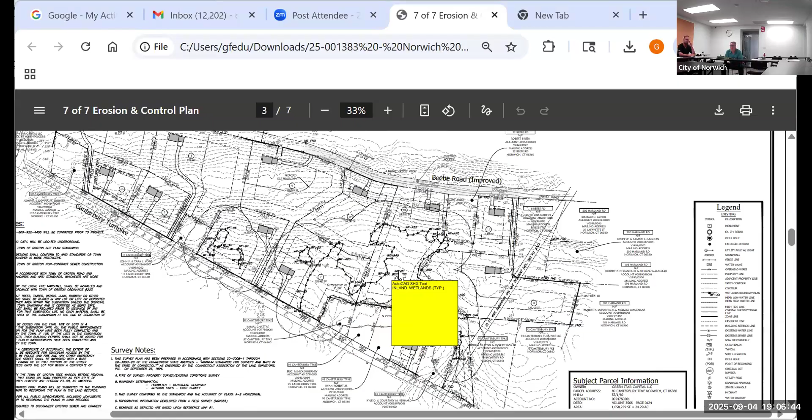Okay, so I don't know if we need to go through all the plans. I figured this is the most applicable to the wetlands activity within the regulated review area, starting on the north side of the property. You can see where the property starts, and starts with lot one. As I stated, lots 1, 2, 3, and 4 do not have any wetlands on them. Canterbury Turnpike is to the west, and Beebe Road portion, most of it's unimproved.

There's only a portion we have access to, so you'll see lots 1 and 4 have access actually off of Canterbury Turnpike with driveways. So they're kind of flag lots, even though they appear to have frontage on Beebe Road. Our access doesn't start till about the middle of lot 6. So lots 6, 8, 9, which is located down off of Canterbury Turnpike, and 11 and 12, the homes and the driveways are located outside of the regulated review area.

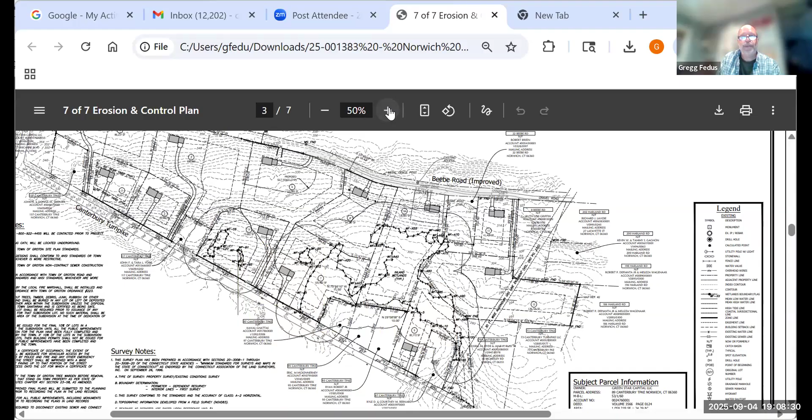So starting with lot 5, I'm gonna blow this up a little bit so we can take a look at it. That access has a driveway off of Canterbury Turnpike. The house is situated in the upper right corner of the lot, I guess the southeast corner of the lot. You can see the wetlands located on the northwest side and central portion of the lot. Little islands of wetlands there. Regulated review areas around those. So the driveway again is pushed to approximately 75 feet from the wetlands, and then the house is located outside.

Just to broad stroke a couple of items on the review memos from the planner as well as the engineer. We do owe some more detail to the plans with utilities and septic designs, preliminary septic designs. So we will show those. But basically the houses are all located on the higher portions of the lot, and the septic systems will be located just down gradient from those. Again, they're not shown here.

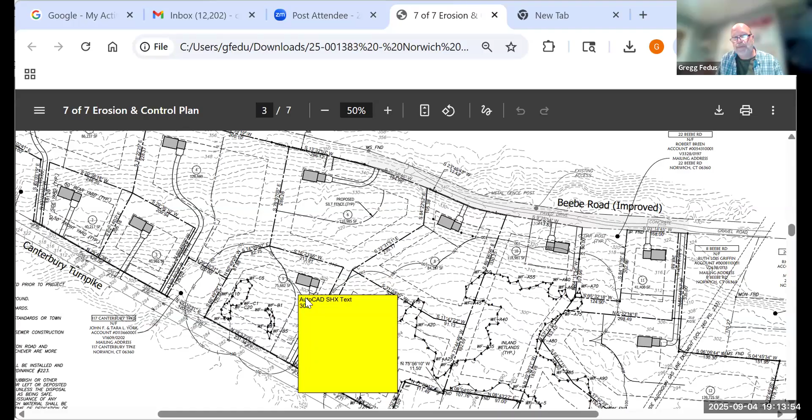Going back to lot number 5, you said the only thing that's in the regulated area is the driveway? That's correct. The driveway is located in the regulated area. Looking at it now, it looks like a portion of the septic system, which is going to be just down gradient of the house, will be on the outskirts of that, probably crossing over the 100-foot regulated review a little bit.

The drainage from the driveway, from the impervious surfaces, that's going where? We made mention in our notes of doing a rain garden for each of the houses that would capture the impervious from the roof structures. The driveways, for example the driveway in 5, would be graded with a slight super elevation away from the wetlands. But we're planning on just dealing with the impervious from the house structures. If it's important, we can take a look at certain driveways and capturing the impervious there also and putting it into a rain garden down gradient.

Lot 6. Can you go into a little more detail? Lot 6 is this one up here. That's pretty far away. Yeah, 7. So 7 is kind of tucked down below this little wetland here, and again within the 100-foot regulated review. The driveway starts just outside of it, but works its way in. It's possible we can flip that house. How much of the house is in the regulated area? Looks like 100% of the house is in the regulated review area, so it's probably about 50 feet to the wetlands.

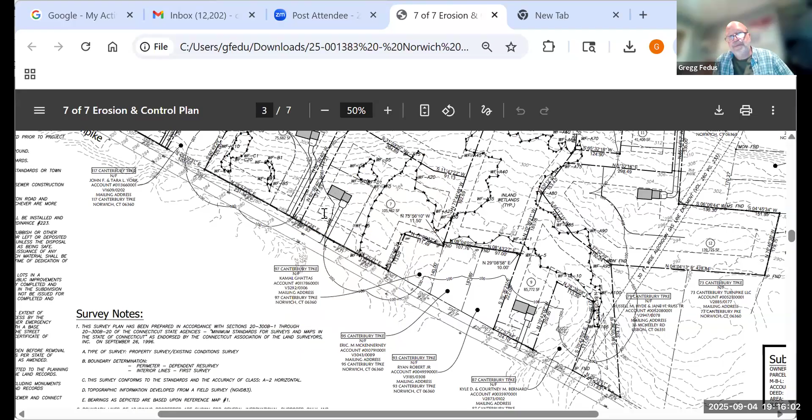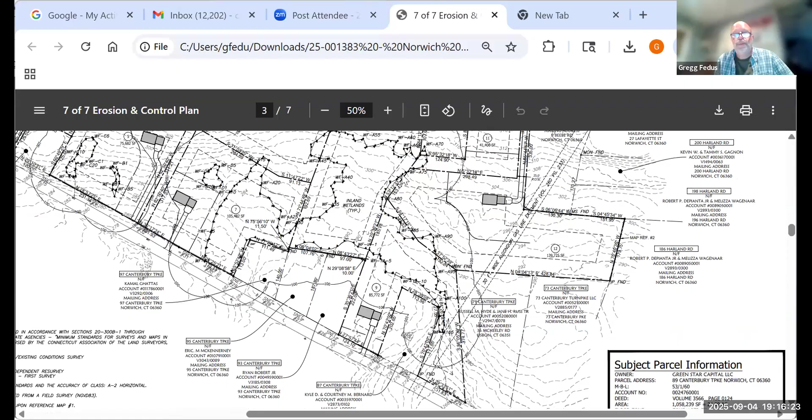Okay, and on lot 10, can you bring that up? Let me get it over and see if I can blow that up a little. So the rear of the house is in the regulated area? Yeah, and that's driven by the front yard setback along Beebe Road. Looks like we could maybe shift it to the middle of the lot and almost get the whole house out of the 100-foot regulated review area.

Having the house on the other side of the driveway, in other words? Yes, and maybe pull the garage forward a little bit. And again, these are just templates for houses. I think one of the comments was you'd be coming back to us for each individual approval. Yes, sir.

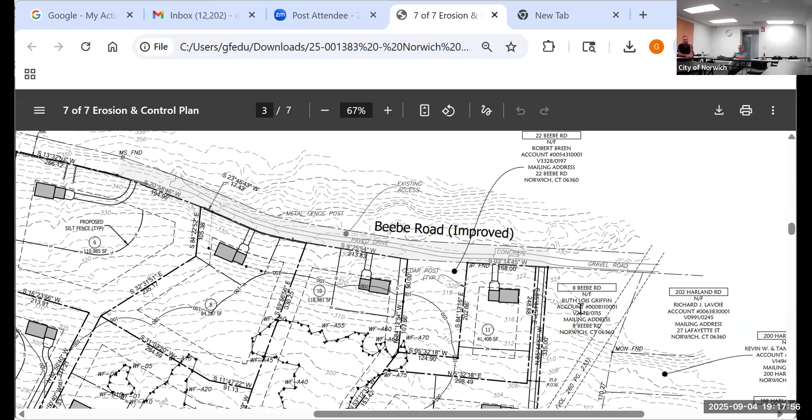Brandon, you have any question? Yeah, I'm just trying to remember how many times we've approved a subdivision with lots where the houses appeared to be either wholly or a good part in the upland review area. Seems to be quite maximized. I guess I have concern. Can you zoom in, please, to the left of 11, at 10? This one? Yes, please.

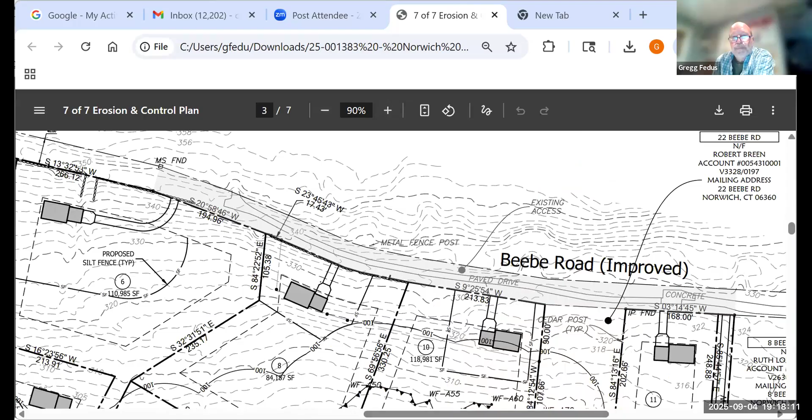Okay, and then move your... trying to get an idea of the topography. That right there is good. Thank you.

So everything sheds, that entire lot sheds into the wetlands. Is that correct? From Beebe Road straight into the wetlands. Beebe Road is up higher than Canterbury Turnpike, so their entire property gradient slopes down all the way towards the wetlands.

So what is your plan to intercept water coming off the rear of lot 10 to slow it down before it gets into the wetland? Did you plan on a rain garden there?

Well, we'd have a rain garden for the impervious of the house and the garage. The driveway, I would like to get it to grade towards Beebe Road. It'll grade away from the garage towards Beebe Road, but I'm not sure we're going to get enough slope or enough height on the garage to get it all the way to the driveway or to Beebe Road. So if your requirements, we'll be back before you with lot 10 with detailed grading.

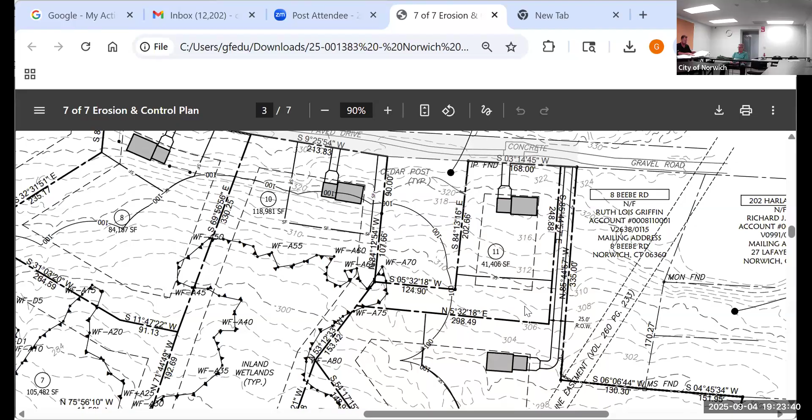We lost you guys. Can you hear everybody now? Yeah, I can hear you. I can hear. Okay.

Dean, did you have any questions? I don't have any questions. There seems to be a lot of details that are not incorporated here - details that aren't included that may be addressed in revisions, such as driveways, wells, septic, and defined grading that town officials may want to see.

What's your feeling, Dan? Would you like to see more detail? I'd suggest that maybe you guys could table this till next month. We have a number of questions we'd like to see answered between myself and the engineer, I think we could make a better decision with more detail. So I can go through my memo, but I think I'd prefer to come back to you next month saying most of it's been addressed.

But they are aware of your concerns or needs right now, right? Okay. Greg has a memo from myself and from Jeff. I'd also like to go through the rest of the committee members to see if they have any questions we might not have thought of. If you have any comments or things, now's the time to get them on the record, and we can have your answers next month. So, fine.

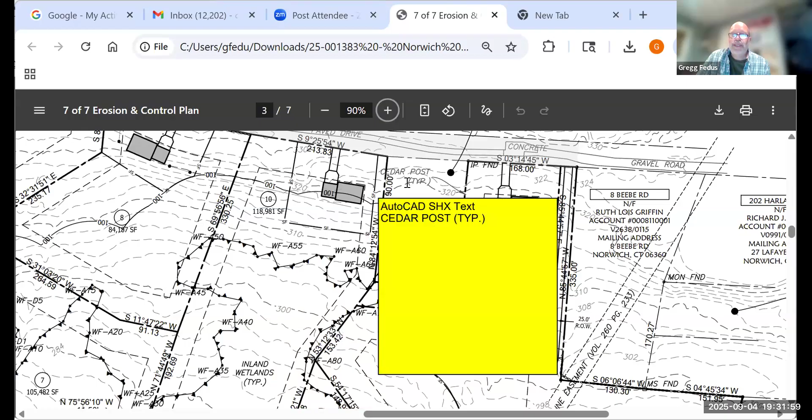I would say coming in up in this area, there's a red house located right across from 10 on the other side of the street. And there's a couple points of access there that get you into this area. And then there's also an access point around this lot, an actual house that burned down a few years back. I don't know if anyone recalls that. So this lot is not part of the subdivision. There's no house there now, but there's actually access in lot 11 that will take you down to this area, back behind this empty lot.

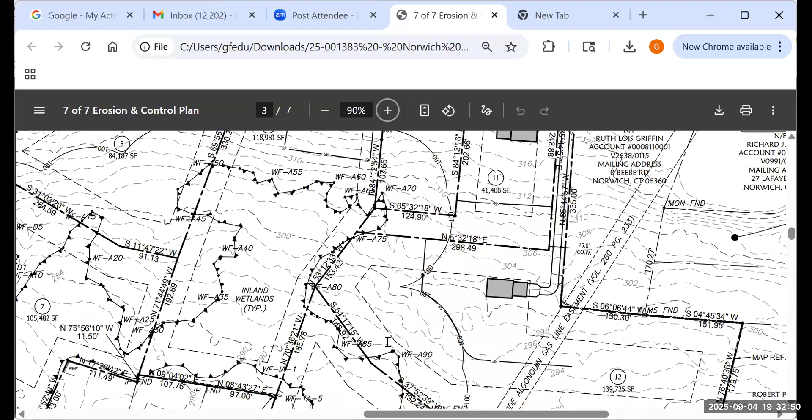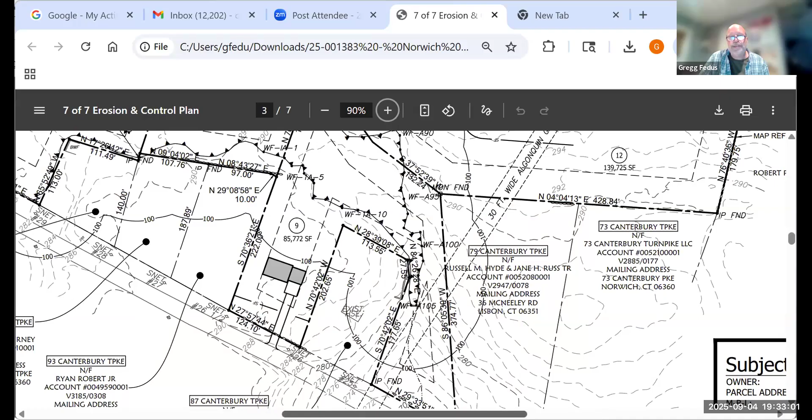We'd be more interested if you could mark access to lots 5, 7, and 10. Yeah, so 10's pretty straightforward. I can do that. Let me just see, there's an access...

Yeah, so between telephone, and I'll mark this on a plan and get it to Dan, but between telephone poles 32 and 33, there's enough room to pull off the road. And then there's a little path over the stone wall that kind of brings you right into this area here. And it's pretty, I have to say, except where we dug, it's pretty dense, but you can see kind of in the distance, or if you want to walk in, you can see the wetland flags in lot 5

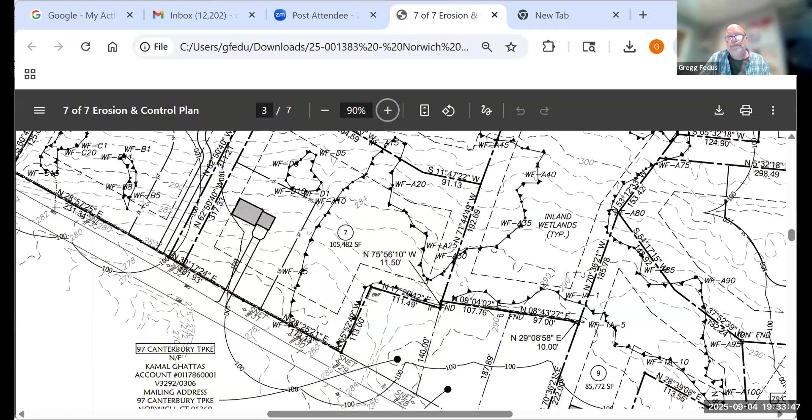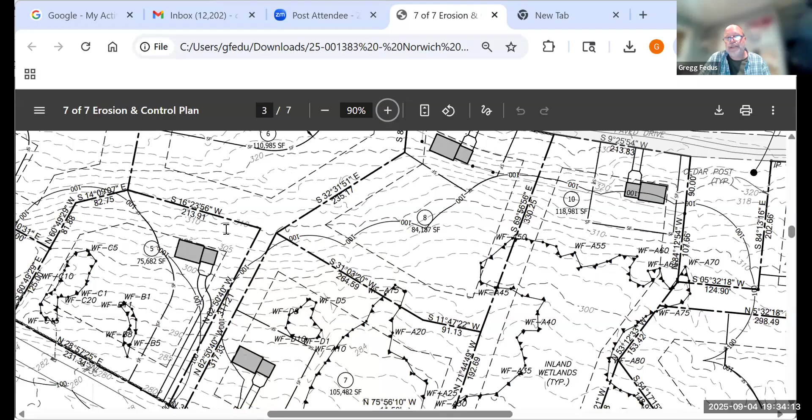that are located here. And then if you kind of walk to the right, you'll see the wetland flags over at lot 7. And then the house, it's pretty thick to walk back up to where this house is going to sit. It's actually probably easier, because it's pretty far away from everything, to walk coming in from the high side. So for 5 and 7, it's pretty straightforward to get into this lower area. You can kind of get an idea what it looks like.

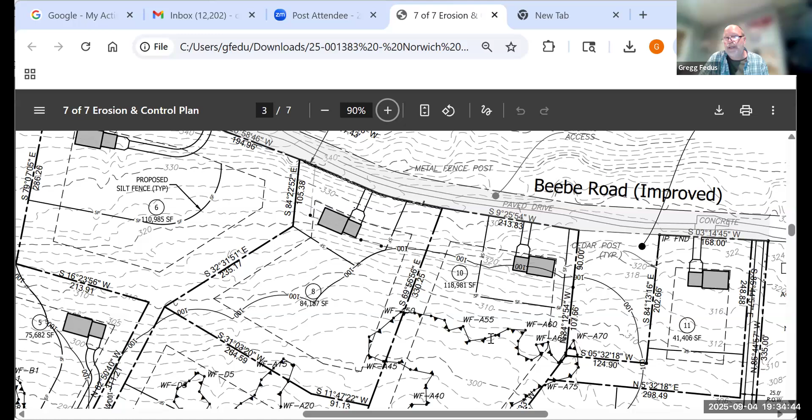And then 10 is, again, pretty straightforward because it's right across from, there's a red house here, which I can mark on the plan. And this is, I wouldn't say pretty open, but there's enough trails to kind of get around. And if you keep walking downhill, you bump into the wetland. Again, I'm happy to meet. The map to Dan? Yes, I will get that to him tomorrow. Okay. I'll send it to him.

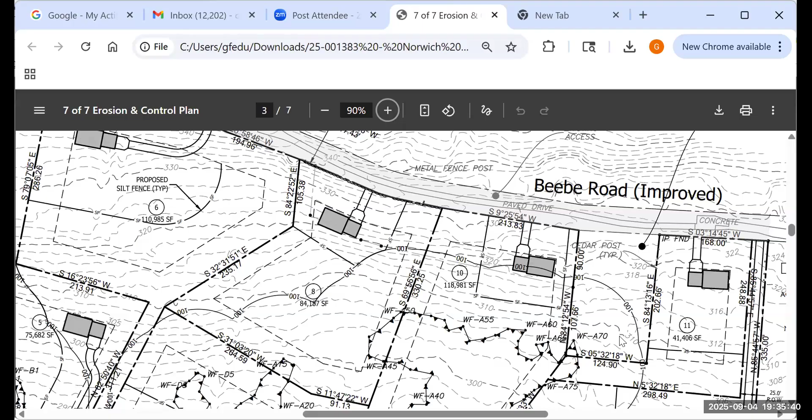Well, I guess first things first, move to table IWWCC 25-08 to the next meeting until we have more information and staff comments are addressed. Pete, second. It's a motion on the table. All in favor? Chris, aye. Pete, aye. Cullen, aye. Annabelle, aye. Dean, aye. Brandon, aye. Rick, aye. Unanimous. So moved. Thank you. Thanks, Greg. We'll be in touch tomorrow. Okay, great. Thank you.

New business. I don't have any new applications for you right now. Okay. Other business, elections. Anybody want to nominate anybody for chair? I nominate Rich Morel as chair. Any other nominations? I'll second. Pete. All in favor? Chris, aye. Pete, aye. Annabelle, aye. Cullen, aye. Dean, aye. Brandon? Okay. Hearing none opposed, then thank you very much, everyone, Mr. Chairman.

Now for vice chairman, is there a nomination? I'd like to nominate Brandon Hyde as he's the second most senior. Pete, second. Are there any other nominations? Hearing none, all in favor? Chris, aye. Pete, aye. Annabelle, aye. Cullen, aye. Dean, aye. Rick, aye, unanimous, so moved, Mr. Vice Chairman. Thank you.